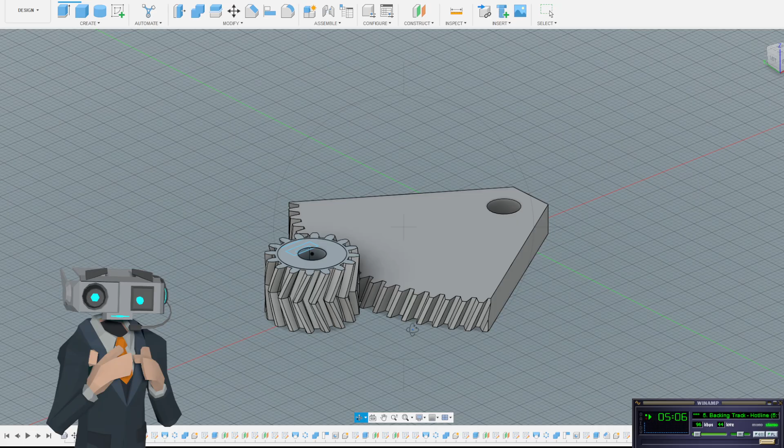We are using a herringbone gear because, let's see if we can get a good view, you can kind of see it's this V shape. The V shape is really good for 3D printing because they stay centered, they stay aligned. So these two, once this is flipped and realigned, will stay basically centered because there's 2 little V's pushing against each other as they turn around.

So if we go back to the starting screen, if you look right in the middle of Rusty's neck, you see these light gray gears, same color I used for the rest of the robot. They're making little V's, the teeth are making little V's, and they're opposite of each other because they have to be — because that's how that works.

There we go. Hydrating. Okay.

So what we're doing tonight is making a different version of those, closer to the more modern Rusty. Unfortunately the stock footage doesn't show the gears.

For one thing, the neck is shorter. Let's see how far my camera can reach here, and whether my leap motion interferes with the camera. Okay, you're looking at my monitor. Finger jump scare, giant finger jump scare.

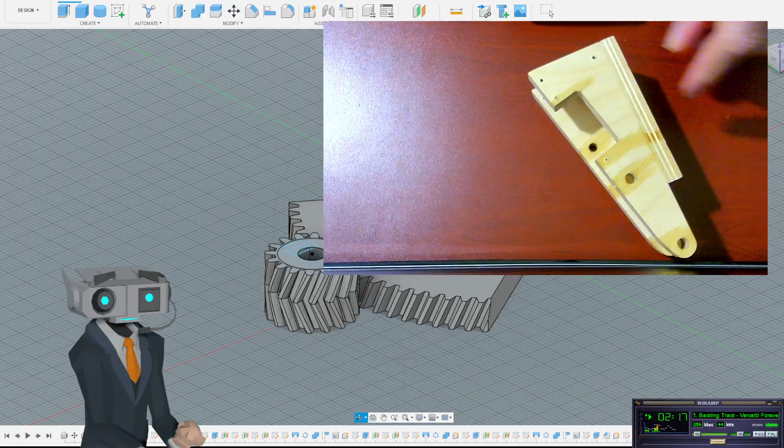So the original neck, the wooden neck, not mech necessarily. Ta-da! Those are some yellowish looking colors - it was carved out of wood.

And the little servo, here's a poor example - this is a smaller servo, and right in there, it's the same size, pretty much the same size as the servos I was using, or am using, I'm currently using. It's a big brother to this one - a lot more torque, two or three times as much torque.

So this was the original neck. You had the two small gears here. Let's see, I brought some goodies - is this gonna be my jingling the keys for chat? Here's one of the gears right here, see? And here'd be a spare, it looks like.

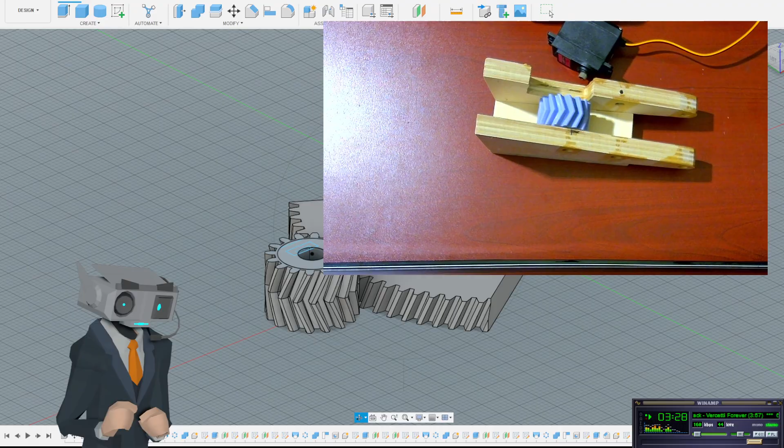Ta-da! So they would have been roughly right there. It's weird seeing it reversed, might have to flip the camera next time I think about it. So these two are here, and then the big gear, which I don't have an example of for some reason - I have a couple sitting in my workshop as spare parts. Yeah, so these lock together and they turn really nicely, see?

But we needed to change things with this configuration. Unfortunately, because it's made in wood and not all in one piece, it's still cut on - this is actually cut on my CNC, so these are precision hole placements, and this whole shape, well the top part of it, was cut out on a computer-controlled router. This way it would match.

So that everything would match up. Focus, focus, get my dried out winter hands... you're not going to focus, are you? Well anyways, these holes precisely match up, but due to the nature of assembling things, come on. Oh wow, that color correction is way off, or I need some vitamins.

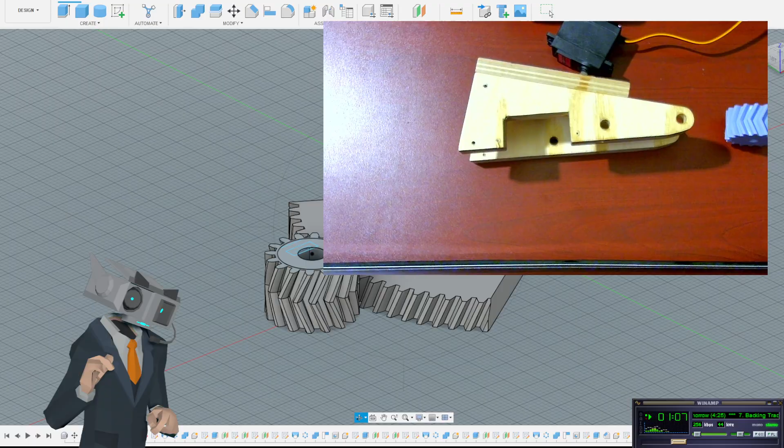There we go. So these holes, just stick a bolt in there, stick a bolt in there, and right there - that would hold the gear, so that's what the gears pivot on. And it's okay that they're on a bolt like this, at least for this one, for the main top of the neck.

It's on a bolt because the actual gear - I'll have to remember to measure that - has a bushing on it, so it's not riding right on 3D printed plastic. It's riding on a nice wear resistant plastic that I machined little bushings for on my metalworking lathe. Precision - precision helps it not wobble around.

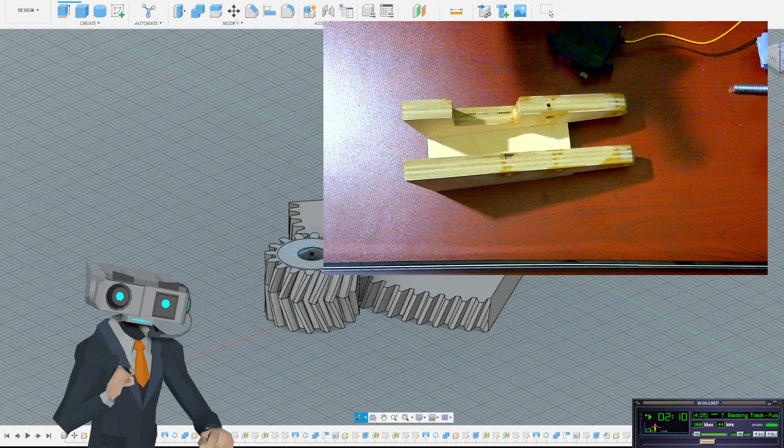And then for this, the middle one, that was sitting on a brass rod and not a bolt, so in theory it should have spun real nice, but it was just slightly misaligned, so every now and then you get a screech. And the dark spots here, I believe that's super glue - it strengthens the bond of the plywood so it wouldn't wear down as quickly, made it more like a resin, almost.

So we went from that to the first version of what Rusty is currently using, which is this - so this became this. Again it looks so weird reversed. Is that right? Yes. So significantly shorter, which helped with the head wobble. It shrunk his neck down because all that weight was sitting on this one little spot right here, so this helped with the head wobble and strengthened things up quite a bit.

So this is 3D printed, and it's the same lovely gray plastic - no more wood, at least for this part.

So the servo moved from here in the front to the back side, and snapped in real nice. I don't know if this one will snap.

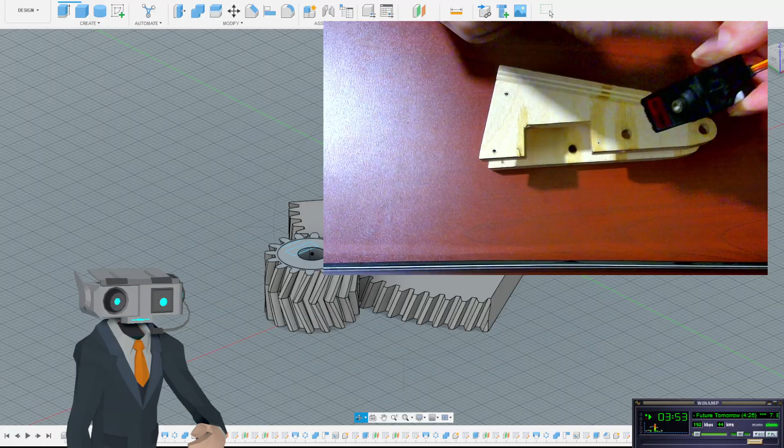Oh no, this one won't, because this one was modified. I trimmed away some of the plastic here. But the real one gives a good satisfying snap when you put it into place, attach a couple screws to really hold it there. It was very sturdy for what it was.

Unfortunately, this design... I've got to get better at handheld camera stuff, huh? This design, unfortunately, the gear here had pressure on it, pushing it away, pushing it out the back, which I fixed in the current design. So we're on revision 3, going on to revision 4 of the neck.

Here's the old wooden one for nostalgia's sake. Actually, I thought I disassembled it and was using it for measuring. So tonight's gears.

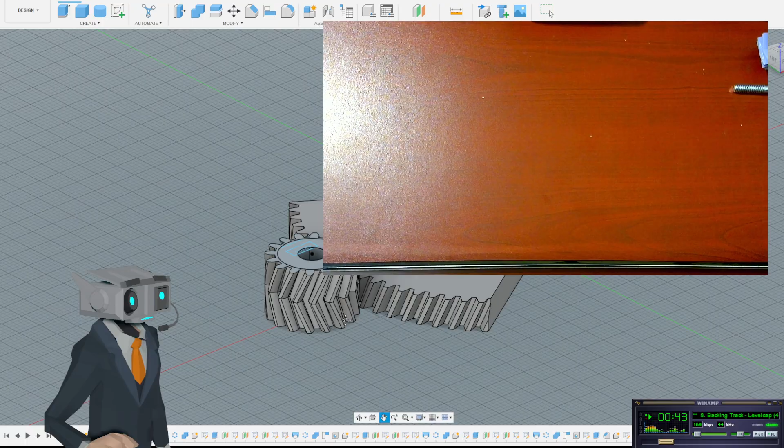What you see, what you would see if I wasn't blocking everything. Those are these. There we go, let's use that as a base.

So there, it's backwards again. Hold on, I gotta flip that camera. That's ridiculous. Oh jeez. Did I just... that was odd. Okay, we are going to flip it.

Properties. This hand? This way? Nope, still wrong. Because I don't want to look at my face being mirrored, I want to see exactly what the camera sees.

So for now, we will just go into transform and flip horizontal. So now it's roughly what I am saying, so this is this, and this is this. Okay, good.

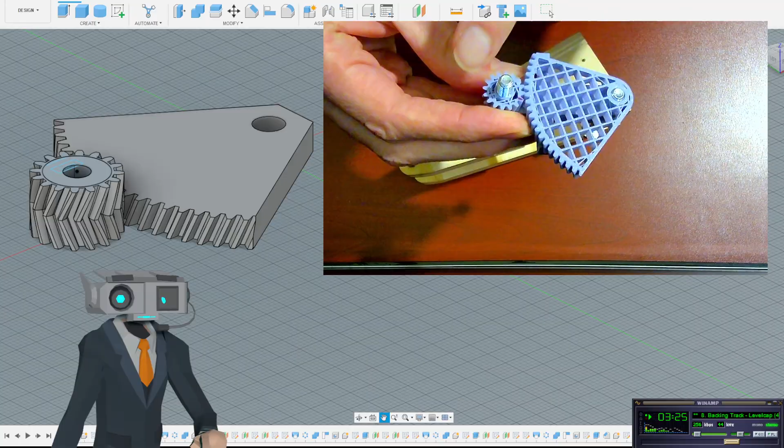This is set up for a 79 to 16, so a 5 to 1, roughly a 5 to 1 ratio. Why is 79 a weird number? Because 80 teeth was just a smidge too big, it was a little too tight.

So we can test that out, we can show you, maybe we can show you. There we go. Duh. Now maybe this would wear down enough, but it turns so much more difficult. Yeah, no, this wouldn't wear down enough. So I made it 79 teeth using the gear generator on the left side of the screen.

It works in the middle here because this is flexing. See the way that the waffles are printed? This moves just enough, the plastic is just flexible enough that it doesn't seem as bad as it is. Okay.

There we go. Now I got the idea to use this size of tooth, this size of gear, from a 3D printable, and the design of how it attaches to the stepper motor. I got the idea from a 3D printed camera pan tilt slider. There we go.

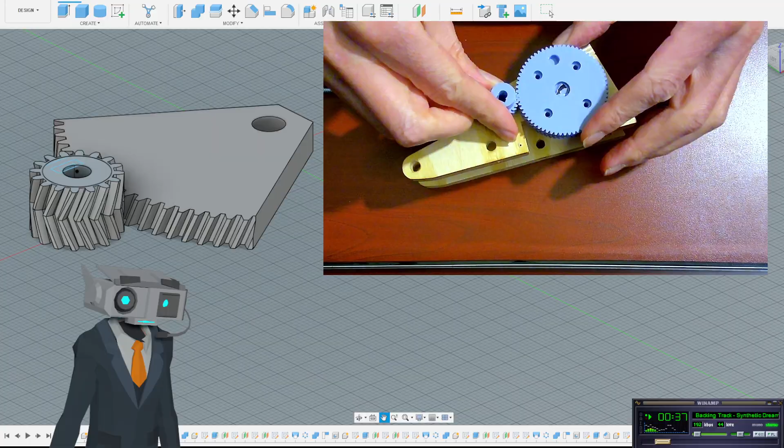See, I'd say it meshes together nice, but unfortunately my 3D printer has a little bit of what's called elephant foot, and I don't think you'd be able to see it here. But basically it squashes the first couple layers down a little bit, so it's not quite lined up. I accounted for that on the test prints though, so we'll be able to print our own gears successfully.

So if you look, there's a slight difference in the size of the teeth. So it'll give us a little bit better traction and also a lot more teeth. And a lot more teeth means we can go to a much smaller gear ratio.

See how much smaller this is? So we'll get a lot more torque, more power, more bang for your buck at the expense of the motor having to turn more.

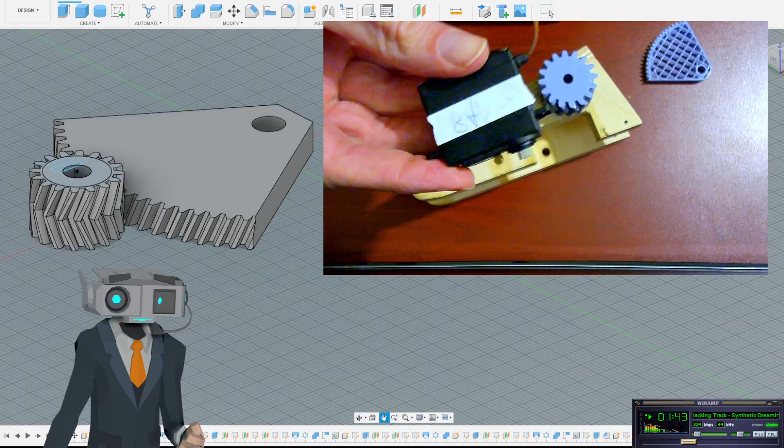So when I'm using a servo motor like I currently use on Rusty's neck - not this one, because this one's bad, see, it says so, maybe - these servos I have only turn 180 degrees because all the gears are on the inside, pretty much right in this part of the box. So the output only turns 180 degrees, this way to that way.

So the current Rusty's neck is a 2-to-1 ratio. This little gear will spin twice around to move this gear once, the much larger gear, which is over on his neck.

Way over there, see, there he is. There's Rusty. Move that over this way just a little bit. There we go. Which one is this? See, past me was thinking of future me. This is 80T, so 80 teeth.

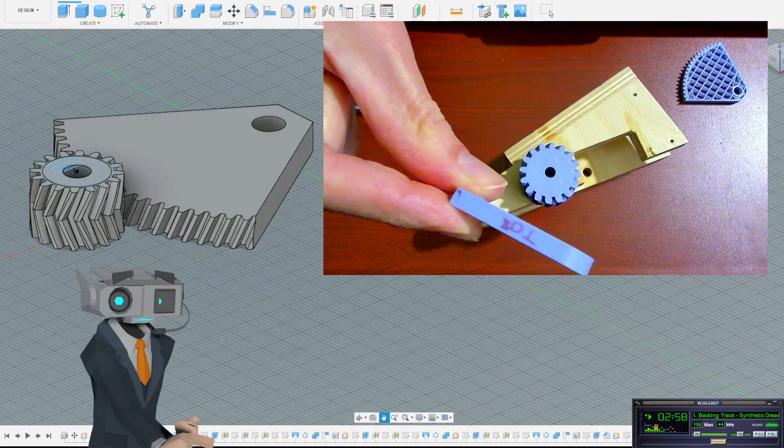And this isn't the full gear. I can bring that up on Fusion and ditch the ham cam for now, because now we know what's up. Might pop it up again. Ta-da! Here's the 79 tooth back in action.

So I could pop that in right here because this is the same distance as this little T piece. T, I don't know why it says I. I'm not entirely sure about that.

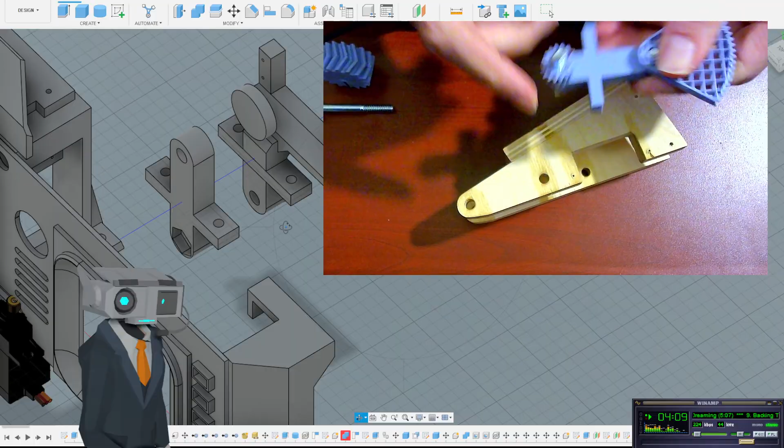This piece controls, or holds, the side to side gear, which on the screen is right here. This must have also been a test piece, so I don't think it has the hex, the indent for the bolt right here.

Yeah, but it's the same distance because I wanted to keep things similar, which we're getting away from now, unfortunately. So now the two gear sets will be different instead of matched. But the side to side is also a 2-to-1 ratio. It gives it strength, and his head doesn't need to go 180 degrees.

The original idea, one of the original designs, is that Rusty's head could be horizontal or vertical. That was one of the original designs, which I abandoned for simplicity's sake. So yes, his head could originally completely flop side to side. The side to side wasn't going to be geared at all, it was going to be right on the servo. Yeah, that's that part.

Okay, so what else I got in my goodie bag? Well, we had a failed gear with larger teeth, or what's called a different module. You can't tell super good from this one, but these are different types of gears. And how you generate the gear is important, especially in CAD software.

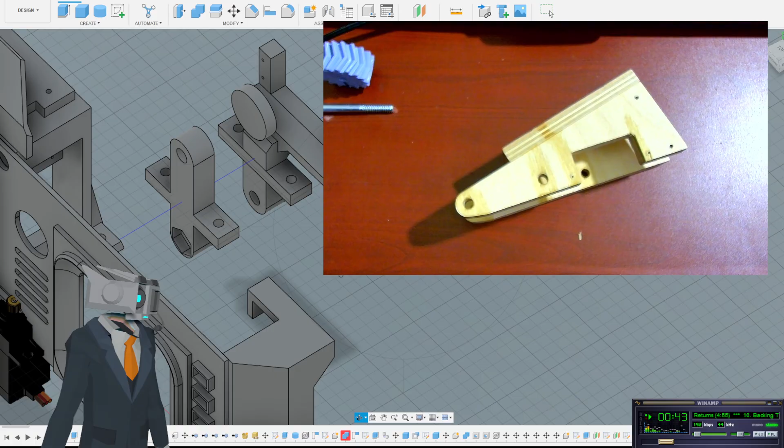I do keep most of my 3D printed parts, even the failures, because for one thing, it's plastic, you can maybe use it for something. Maybe I can scavenge something from this down the road - chop off this part and boom, I still have a servo mount. I can just bolt this down to something else, maybe.

I didn't want to burn this, it's his original neck. I'm not going to reuse it, I'm not going back to this style. For one thing, the servo, where it was mounted, rocked back and forth a bit. But it was his first neck. What did they used to do back in the day? They used to bronze baby shoes.

Oh here's the good one, there we go. This was laying down by my feet. Ta-da! There we go. We're going from this to essentially this. Yeah, that way, no. There, this. It really doesn't like to stay. There we go.

So this plastic, this gray part, is the same size as what he's currently using. It's just that it's completely redesigned, so it would take the stepper motor, again, like on a 3D printer, or a small hobby CNC machine. And yeah, that's the size difference.

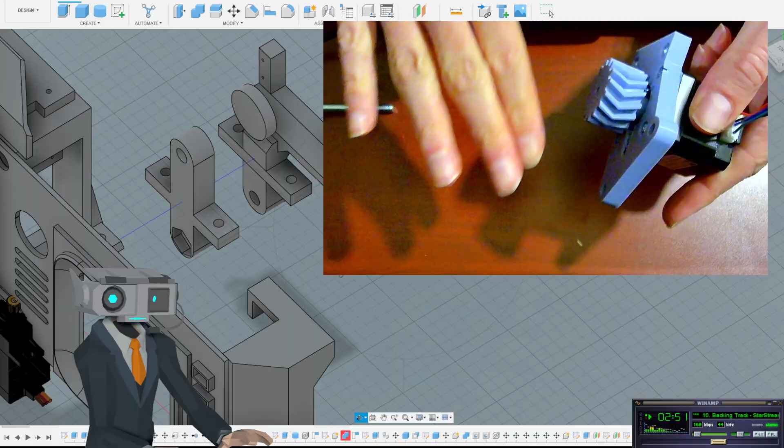So let's get gearing. The thing we are going to do is put a smaller, much smaller gear on here. We're saving the rest of this, we're not changing any of this. But tonight we're finishing up this gear. Then we're also going to make the gear it connects to, meshes with. When two gears are working properly, they are meshed.

Okay, so I'm going to turn off the camera for now and get it out of my face. Well, not my face, my hand's face.

Oh sure, the hand tracking goes way over there. I need to move my Leap around more, I think.

Just for fun while we're in here - oh yeah, see here's... I don't properly split my files apart. So here is the piece with the stepper motor. There it is, mixed in with everything else. And I have a whole bunch of stuff hidden in the assembly right now.

Let's see, neck joint. Get back over here. Ta-da! Yeah, it's not properly spaced, but it works just fine. Mostly I wanted this piece in the middle.

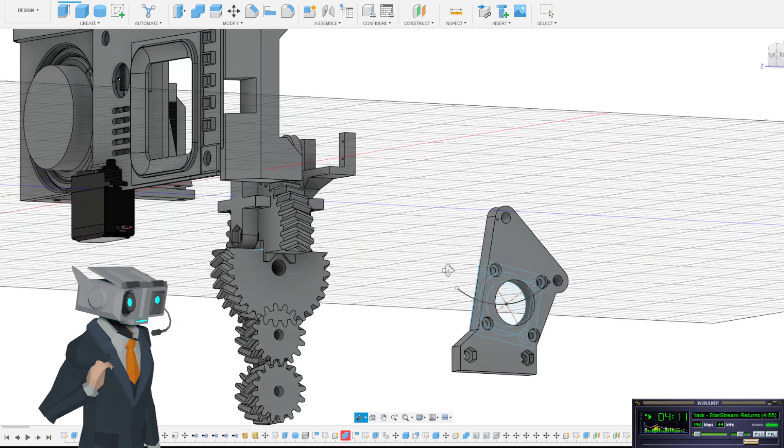So here you can see that they are identical halves at 90 degrees to each other, so you can get the nod and the side to side. And then these two smaller gears, which are 16 tooth - 16 big teeth.

Those were the original wooden neck. Currently we're only using one of these, and still the same original neck assembly. Original neck assembly - oh, look at that.

Fusion saves the background color per file. Well, that's interesting. Okay, so everybody...

I was working on this the other day, getting it all situated. I was like, okay, let's get this 3D printed so we'll have it ready for stream. And I paused and I was like, why don't we work on it on stream? You know, some more robot behind the scenes, so we're not just playing video games with the robot - we're working on the robot.

Because I probably won't be doing a whole lot of coding of the robot on stream, because by this time at night my brain is relatively fried due to doing coding all day. But then also, I have a toddler that likes to wake up at 4 in the morning, so by 9 or 10 p.m. it's a wee bit late.

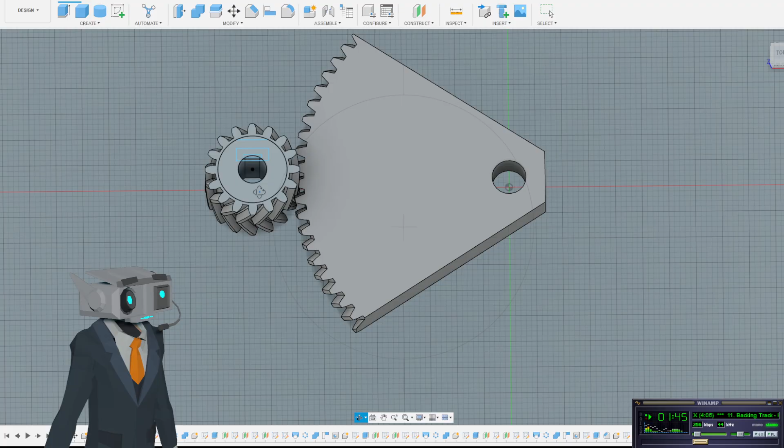So, but yes, I thought, why don't we just do this on stream? I already have it sketched out. So in Fusion, one of the ways to generate shapes is to sketch it. Let's pick a perspective, non-perspective.

Okay, so basically I'm using a gear generator because I'm not drawing this - theoretically you could do it. I could do it in like Illustrator, probably. Map out the shape of the tooth and then rotate it by a correct number of degrees, and then take that line art, bring it into Fusion, and extrude it. Got the extrude tool up here.

Ooh, oh you don't get the nice pop-ups because yeah, I'm doing application capture instead of monitor display capture. Display capture, window capture, there we go. I think I'm doing window capture, so you don't get the nice pop-ups, but we'll just have to deal with that for tonight.

So what we have here - get a little more centered - we have the gear. It's already helical, which means it's a helical gear. It means the teeth are at a slant.

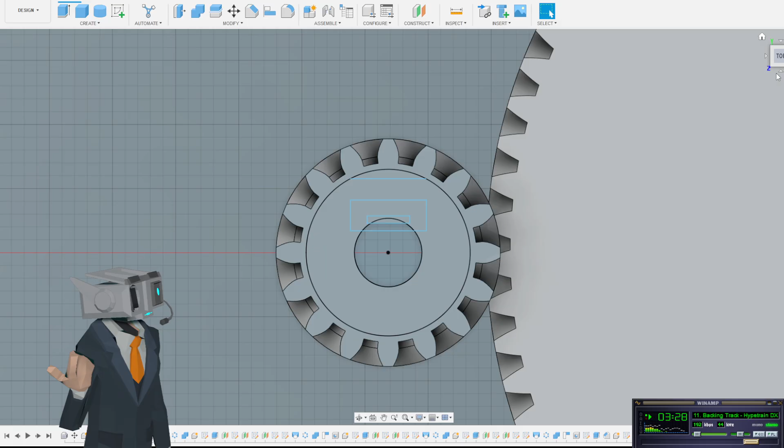But then I copy it, mirror it across an axis so it looks like a V instead of just a slant. What I mean with that, let's go perspective again. Perspective - so this is the helical gear that it generates. Yes, but then to make it a herringbone is basically just two helical gears pasted together, as far as CAD is concerned.

Yes, so this one's already set up, much like the bigger gears that Rusty is already using - these guys, see? We're just making them with more teeth, smaller teeth, and a different gear ratio. So I already have it drawn out on how I want to extrude this.

So what we have right now is we have it set up for a stepper motor shaft. I did the measurements - so with the stepper motor shaft, there's a little flat piece, so it's round, and then there's a little flat, which you can then attach pulleys and whatnot to. So that hole's already done.

I've tried it and the printer does a good enough job - my 3D printer does a good enough job. I can slide the gear on there and it stays put, but I want that little extra bit of insurance so the plastic might not just rip out.

So we're going to also add - zoom in, there we go - a spot for a little nut and bolt to press against the shaft like a real pulley would have. It's called like a set screw or grub screw - I do get those confused, even though I've worked with them for decades.

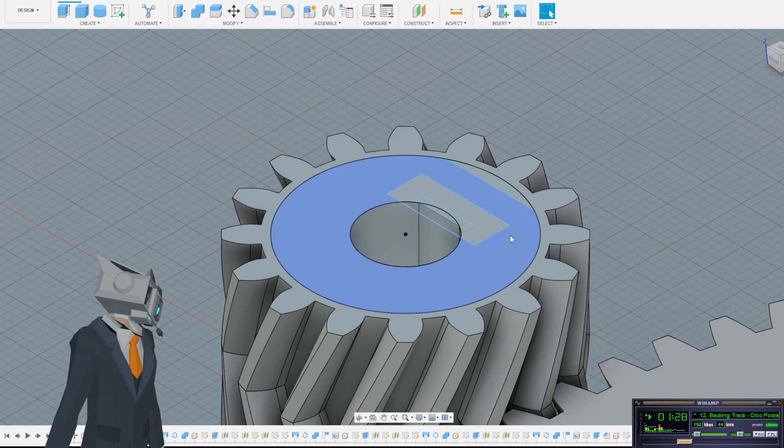So, how far do we need to go? Let me get my trusty calipers here. I'm taking dimensions off of that camera slider with a different size gear. Sadly, I couldn't just use those gears right off of the rack.

Okay, we're going with 8, and we're doing a little bit different shape. So this is a sketch that I've drawn. We'll be using a sketch again soon enough, I'll show you then. But basically, I've drawn out these shapes. Now, okay, fine, twisted my arm, twisted my own arm. Edit sketch.

So instead of doing everything one operation at a time, you can lay everything out first before you do it and use that as a reference point, or, what I like to do, is setups for extrusions. What we're going to do here is...

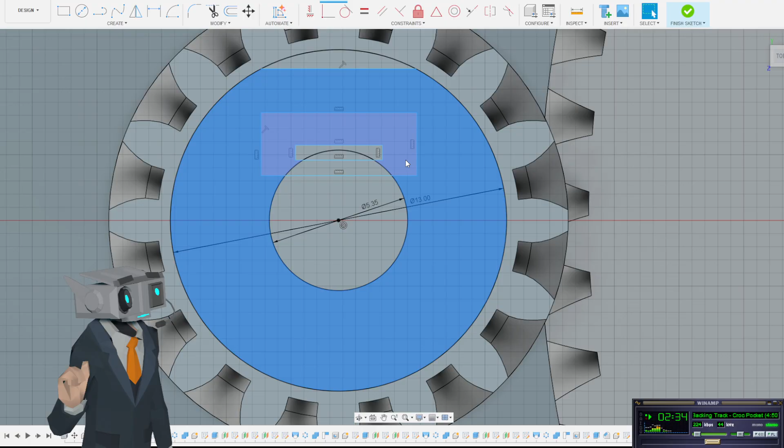So I left a flat spot on top for the bolt, and this is where the hex nut goes. So it's a hex bolt and hex nut. This is where the hex nut's going to be, so that the bolt stays put and it can press against the motor, hold it in place. A lot of talking for a fairly simple thing.

Okay, we want this, and for now, this. I'm gonna finish the sketch. Extrude 8. So that's 8 millimeters. Doesn't seem like much, but this is tiny, this is pretty tiny. Okay, and we're joining.

So we're... yes. Oh, you're not getting any of this. I will have it set up differently the next time I do a CAD stream here. Does it get doxxed? I mean, I did change my team hub to Rusty Industries, so I think we're good. I will, if anybody has any questions, I will step you through it.

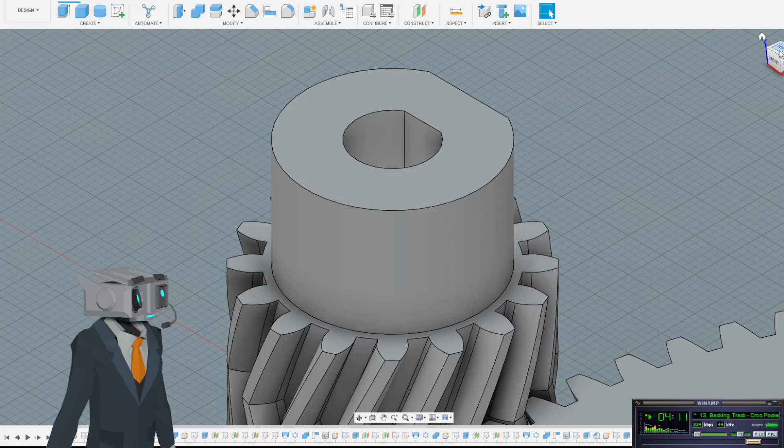Okay, so we made the hub. And now we need to cut a slot into the hub.

Where am I? Where are you? There we go. Okay, make it invisible for now so we can select the stuff. Take this, and I believe... yep, we're just cutting this... oh, we're cutting this rectangle back into it.

So now I want to see this again. This time we're using slightly different settings. We're going to extrude, we'll make that 8, but we are changing how it extrudes. We're going to change it so that it extrudes from this plane, the top of the gear, but with an offset. Let's find out what that offset is.

Now, I should really take it off of the gear I'm currently using. Hold on. There we go, much better.

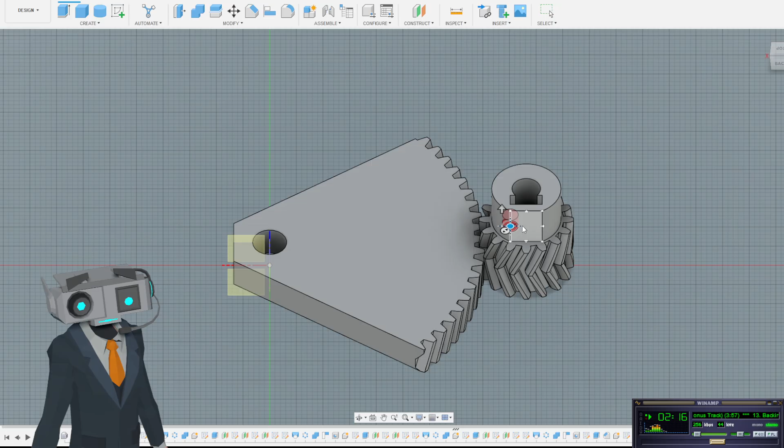I'm going to narrate a little bit, that's the hole tool. Narrate a little bit because unfortunately window capture does not do its job. Let's see, window capture doesn't show the windows, doesn't show any little pop-ups. And this is a problem with Maya too, and I imagine any app that does such.

3.5. Make sure it's deep enough. I do love how it gives you a little preview. Yes, so this will cut plenty deep. There, and now we have a hole, simple as that.

We don't have to worry about polygons or anything because this is solid modeling. It is what you see, what you see is what you get. It is solid. If you want it to be hollow, you can worry about that in whatever you're using to machine or create the physical piece. In my case, it'd be a 3D printer slicer software.

Or you can use some of these fancy tools, which you won't be able to see because they're in the menus, to effectively hollow out. So you can control in the CAD software how you want to hollow out the piece. If you want it to have 3 millimeter thick walls, basically, you can do that.

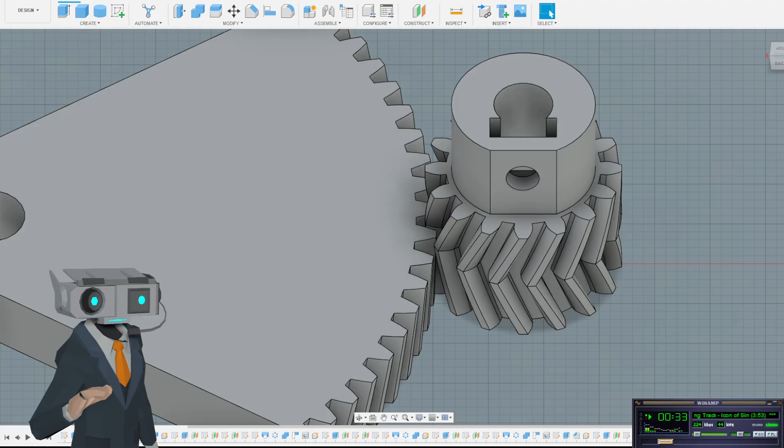That is a thing you can easily do. And a cool thing about this, and probably other CAD software too, if you see this timeline down here, all these little icons are all operations. This is effectively, I could Control Z through them. These are all the steps that were created to make what you see, even if I'm selecting different pieces, it's all on one history timeline here.

Cool thing is, well, we're not far enough. I got Winamp blocking everybody. But so I have this piece highlighted. Let's do this hole over here. We have this hole I punched in here so I would know the distance. That hole is blocked by Winamp. Here we go. How's this one?

This was part of the gear generation right here, where it made this top surface. I made a few trial pieces, so there are lots of gear generations in here. But yeah, this piece is done. We can now send this to the 3D printer.

Almost done, almost done. I do have to do one little thing. Let's see, we are going to... Will it let me chamfer? 1. No, it will not let me do 1. Will let me do 0.5.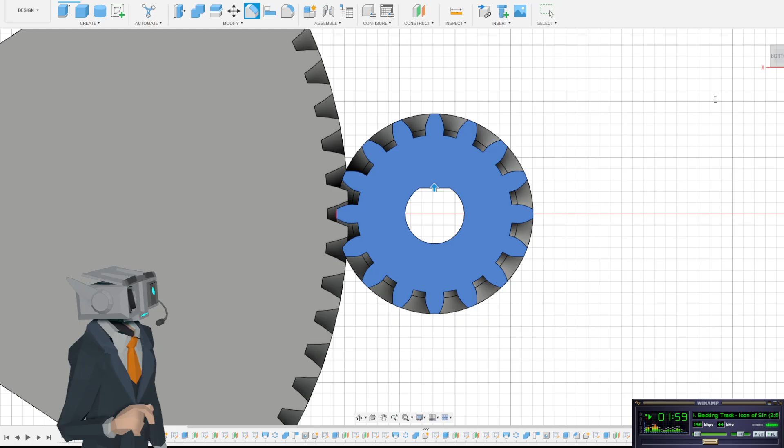Yes, okay. So earlier I said that my 3D printer has a problem with something called elephant's foot, where it kind of squishes the bottom layers of it. It's very annoying. A way around that is to add this little chamfer. You might call a bevel, but it's a chamfer. Essentially thinning out the bottom of the piece, in this case, to counteract the elephant's foot.

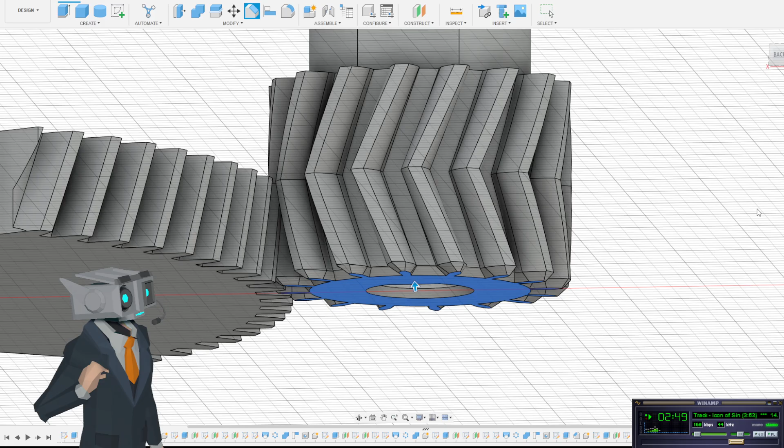I think 0.5 is enough. There, and that should be good. It's especially, most pieces it doesn't bother me. Like structural pieces, it doesn't really bother me having that. I can usually sand or slice off a little bit.

These are teeth. There are 16 of them here, and there's going to be about 40 of them on the big gear. I don't want to sit there with a tiny file, which I do have over on my workbench, zipping each and every space in between the teeth. No, thank you. So we do this the right way in the first place. Or the easy way, at least. The easy way in the first place.

Okay, so that gear is done. We're gonna do the same thing to this one.

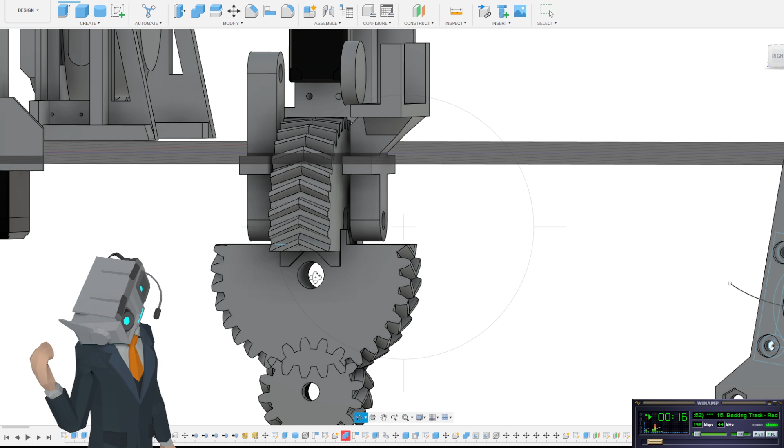However, I'm wondering if we want to redesign it a little bit. So here's his current neck, and it is a little more than 180 degrees of the gear, because this hole is the pivot. This is the center of the gear. It goes a little bit past that, just to make it easier to mount everything solid.

Technically, I could have chopped off some of these edges, and it'd be just fine. He doesn't tilt forward or backwards 180 degrees. And I really don't want him to.

So I think for now I'm going to duplicate this. Let's see how wide these pieces are. Does it say? It does say. There you go, some of the things pop up. 20 millimeters. We are currently working with 8 millimeters.

And these are glued together also, so these are the exact same gear, same orientation and everything. And then one is rotated and they're glued together with super glue, and they do not come apart. I left little tabs here to kind of guide them and lock them in place, but also if I needed to put screws in, no. Super glue. So it's a 20 millimeter by 20 millimeter connection, and it has held for over a year now.

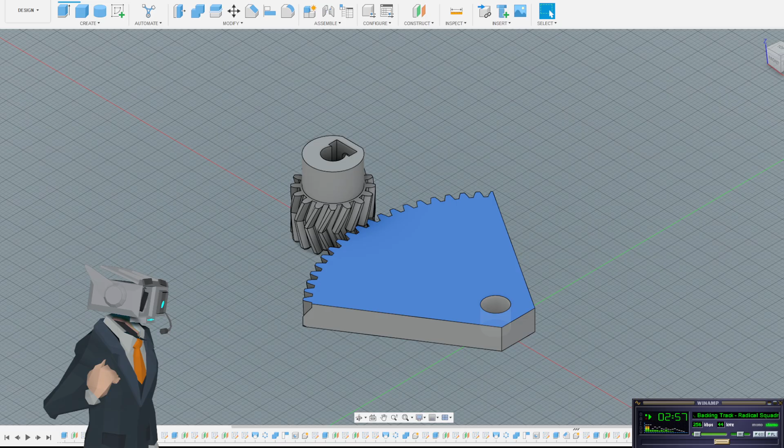So I just need to find where we sliced it. Is it this operation? That's a combine. Extrude. Mirrored. Pardon me, I'm talking to myself here. So that's the hole.

Here we go, sketch 7. What steps use sketch 7? Right here. Okay, so I extruded a shape that cut away. Normally when you think extrude, you think you're making things thicker, pulling more out of a shape. Well, in this case, you can also pull something up but cut away.

So what we're going to do is edit this sketch. We're going to go back in time and change this. We have this Pac-Man shape, and we're going to take Pac-Man and make him less Pac-Man. Okay, the pivot, the circle, is right here.

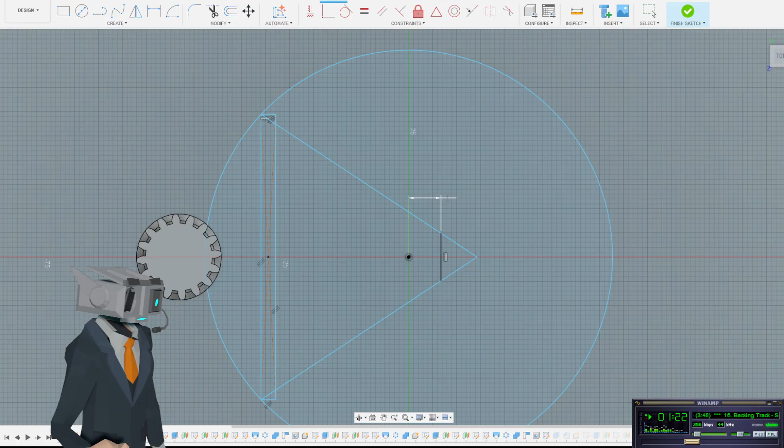One of the wonderful things about CAD is you can kind of do what you want. So that line, yeah, basically we want to cut this whole thing down, right to there. It was that easy. That is as easy as it is.

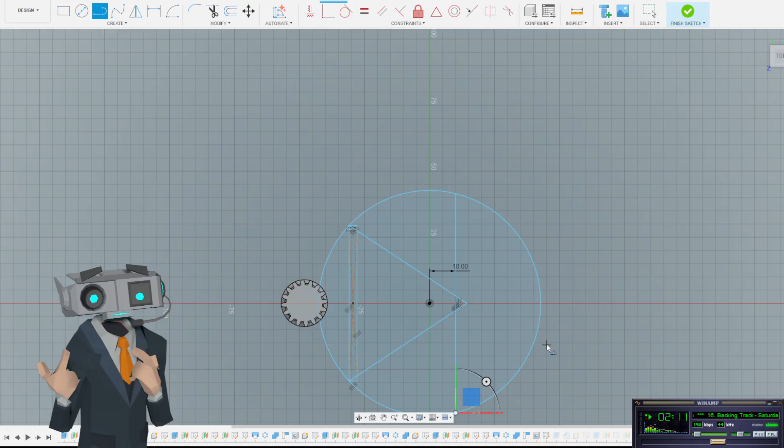Like I said, we are going to need to make spacers to hold the wider gear to the thinner gear. But I'm not certain if I want it offset now, because we have a lot of space right now in his current neck, and that space doesn't need to be there anymore because the gear is going to be so much narrower. So I'll be making a little adapter piece later.

Because I'm gonna have to reprint the side-to-side gear, and I'm gonna have to reprint this top gear anyways, because it is glued very, very well to this gear. So when I reprint it, I will move these little tabs, these little ears, gussets - well, these might technically be gussets - we're gonna move those in just a little bit. We'll figure that out later though.

That'll be a problem for later Rusty. Current Rusty is good to go. All right, so we have the hole here, and we have all of this here.

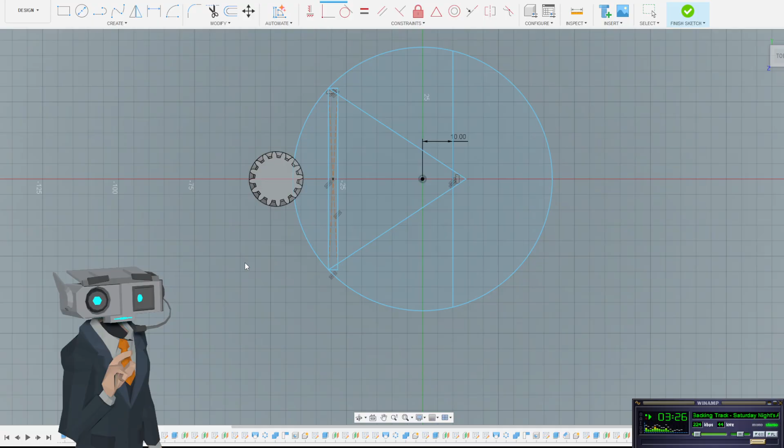So we finished this, we edited the sketch, and now that will update - that will update the shapes that are already out there. Completing extrude. It had to think about all that fancy gear stuff.

And now we go to the extrude. Is that this one? This one, where we cut away. Oh, topsy-turvy view, come on. There we go. So not that one, not that one. This one. There we go.

So we're going to go back in the past again and edit things. There we go, ta-da! You can see here's where I extruded the Pac-Man shape. Now a fun thing we can do is just that - we're done. Well, we're almost done.

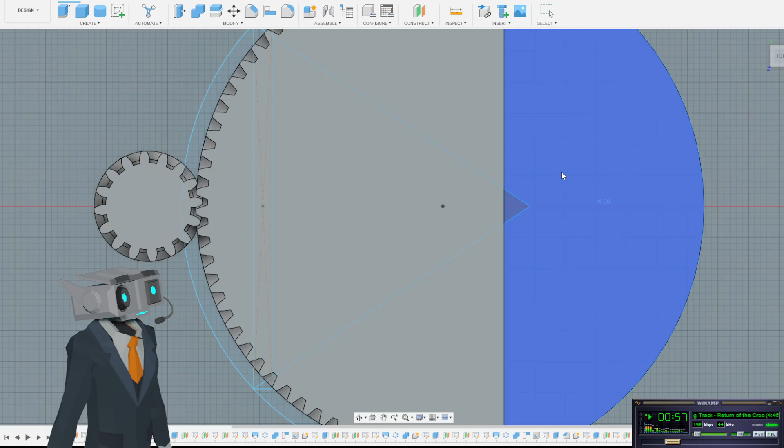Two little hanging-on pieces, but there. It has to think a little bit - normally it doesn't take this long to think, but also normally there's not a whole bunch of these complicated looking angles all over the place.

So there, now we have the right shape. It already has the same hole in it, the correct hole. So it looks... oh, that hole was dependent on where the cutoff line used to be. See, I figured there'd be a problem for current Rusty.

Still though, I absolutely love that you can just go back in and edit features. I'm just gonna plot that right there. 6.41 millimeters - is that about the right size? That is not the right size.

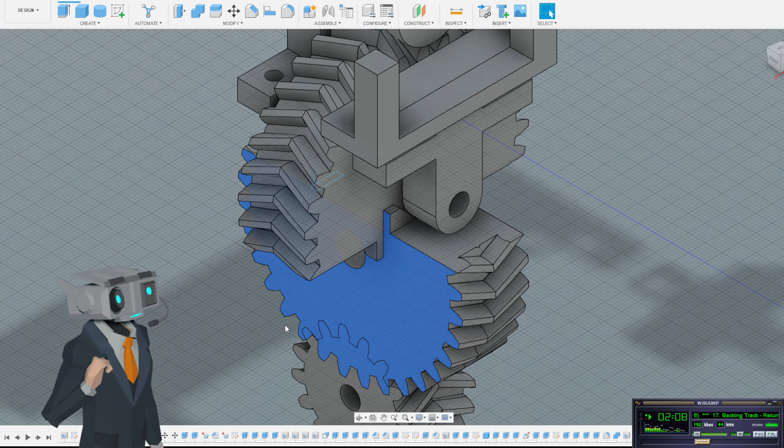Uh-oh, uh-oh, uh-oh. For a second there, I thought we crashed.

So this hole is significantly larger because it has a bushing, a little machined plastic piece. Let's find out how big that is.

Okay, diameter is 9. You can't see, but there's a nice little tool window, an info window over here that tells me what I clicked on using the measuring tool, the inspect tool. It gives me the radius, the diameter, the area, and the loop length, which I assume is the circumference. Okay, so 9 - that makes sense now.

So where were we? Yes, editing features, because why do it twice? Why not just go back and redo it once? That's exactly 9? Okay.

There we go, fixed. And it's directly on the origin point, so that's how I know it's where it's supposed to be. Now we do the easy part. We take this, we save.

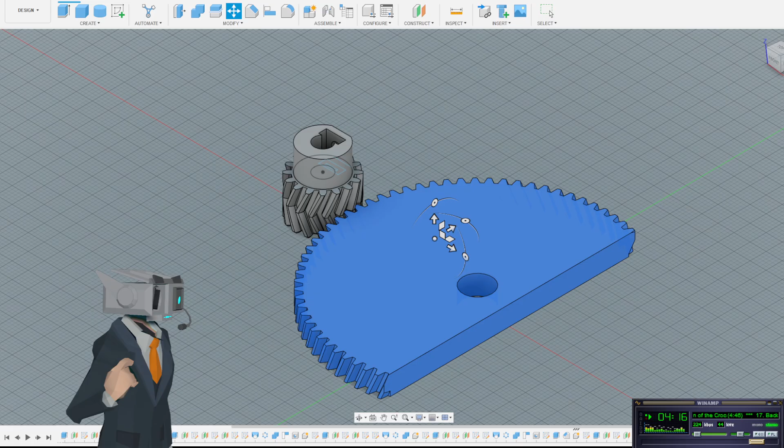We're going to move object body. Or do we mirror it? Do we mirror it? Oh, we mirror it. Sorry. My mistake, my mistake.

You would think I was just in here the other day. Mirror, there it is. For some reason, mirror is under create instead of modify. Mirror plane, join.

And now we have a helical gear. Ta-da! And it looks like they're pointing opposite of each other. So big success, big success.

Now we can print it. This one does not need the little hub, it does not need this part on it, because again, this piece gets a little bushing put in it.

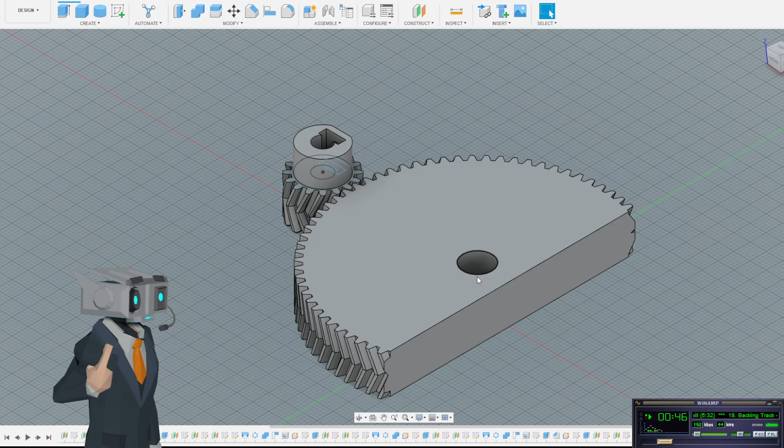I could just bring Rusty's head over here. Yeah, there we go, gears. We've got gears, folks, gears of robot. Beautiful, beautiful. Let's turn off our sketch.

Make a screenshot. Boom.

And then to send this to the printer, yeah, we could do that. Let's see, the little gear shouldn't take too long. I mean, we're not going to do it tonight. I thought about it, we're not going to do it tonight, but I thought about it.

I'm going to save. Here's herringbone.

Okay, so we select our piece, our body. Go to manage. Nope, we don't go to manage, we go to utilities. And this is available in the personal version too. Over here, again, you're not seeing my darn windows.

There's a little export, and I think I just left on the default settings. It says output selected object, which is the blue because it's selected. I'm outputting it to an STL, which is a, what does it stand for? Standard something lithography? It's for 3D printing. And we hit OK, and I'm saving everything on my desktop because that's where it goes. Oh, you're not getting this window either.

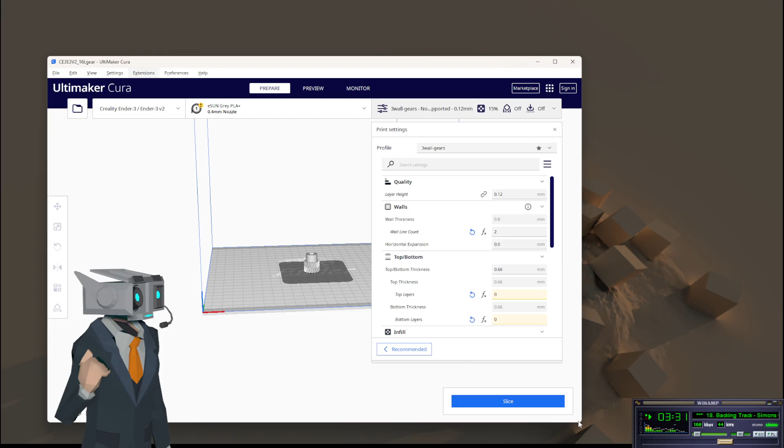So I use Cura, it's nice and easy. But here, look it, here's our little gear. And this is set up for my, I have an Ender 3 V2. There we go, and settings that I found have worked out great for gears, specifically these gears.

So if you look at the bottom, see this teal, this lovely, hey, it matches my eyes. Look at that, so this lovely teal. If you look on here, this is what will be touching the printer bed.

So this will be the first layer that's printed once I slice it. So you can see it's a little bit smaller. Hopefully this counteracts my, it did at least in the test print I've done of a very similar gear. It counteracted the printer errors.

I just really need to calibrate it and adjust the tension, look up more tutorials. Most of the time it's not a problem. What could be a problem is this little hole right here.

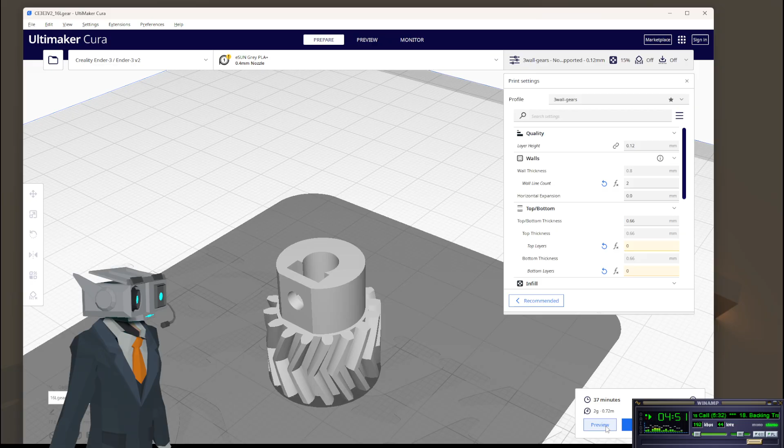37 minutes, this will take 37 minutes and use 2 grams of filament. Oh, it'll use more than that.

This is again for the test piece, which does not have a top or bottom. Let's change those back. Okay, we're gonna have 3 walls, we're going to have 4 tops, 4 bottoms. Oop, not 44. There we go.

There we go. Now it's going to take a couple more minutes, 5 more minutes, and use 3 grams. Not much more, not much more for this tiny gear. It makes a big difference for the 79 tooth gear.

But see, there you go, there's layer 1. And it quickly adds in more layers, or more thickness. Grows up big and strong. Does a little boogie woogie as the teeth change direction. And there we go.

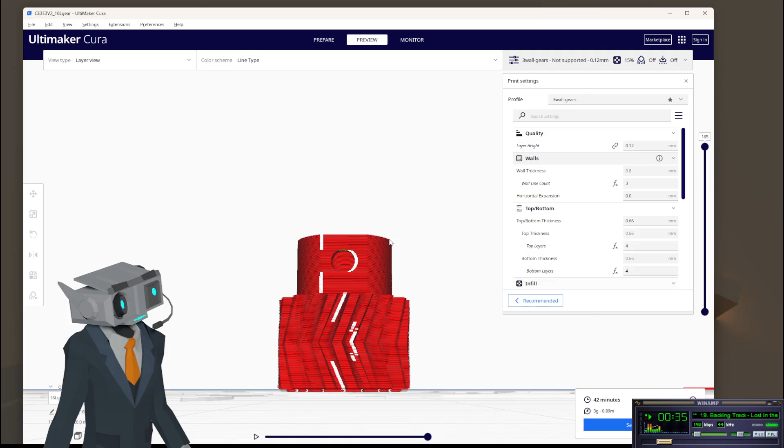And my printer's good enough with doing overhangs that I can do circles like this with. It's just slightly oblong, but it does just fine with circles. There, beautiful, beautiful.

And we're just gonna save that, and call it good. Oops. Oh, my windows are janked up.

And you know, we can do the same thing with the other one. Fusion. Hey, look, you get actual fusion.

Select the big gear. 3D print. Oh, here's what the windows look like. See? So I selected the gear, set it up for export using this lovely make button. I just hit OK, I'm okay with the default settings. We'll call this 79T here.

Saving to desktop because I'm a heathen. Let's minimize that and load it up in Cura.

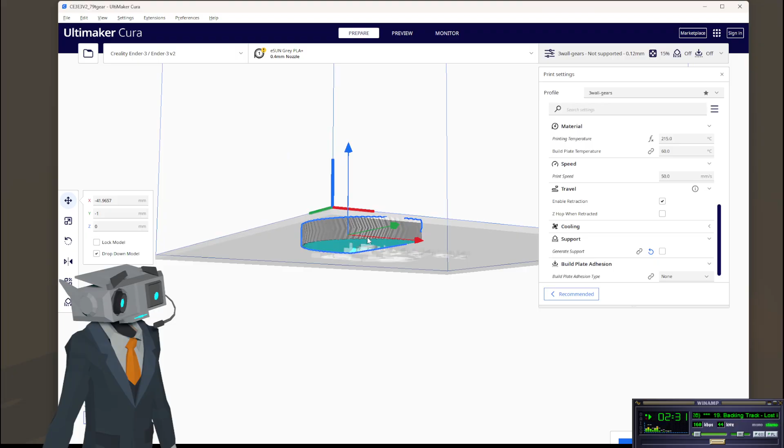We have to go back in and shrink the teeth thing. Yeah, this one's going to take 2 hours and 49 minutes, so almost 3 hours. And it's going to use 5 times the filament.

Nope, I need to change more settings. I just thought of this. So it's a good thing I'm doing this and talking it through.

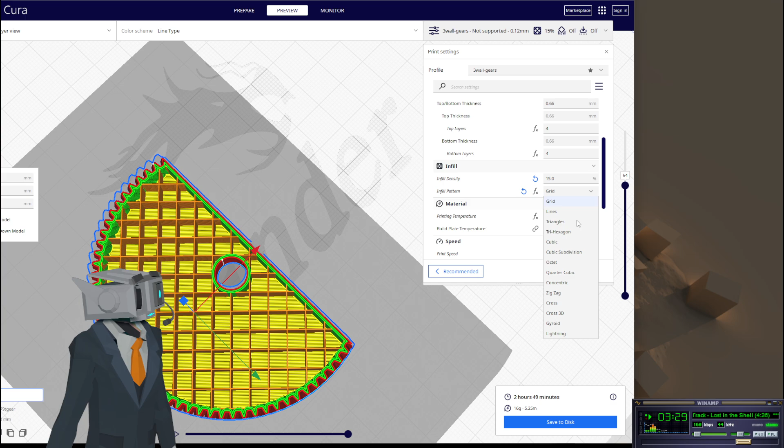So, if we look, this is using a grid infill. What I like to do for gears, especially if they're going to be doing a lot of work, is we go down to gyroid. What is gyroid? Spaghetti. It's funky spaghetti.

So what it does is it draws zigzags, and it looks pretty funky. But what it's doing is it's rotating those curvy lines as it goes up layer by layer. And it makes it really, really strong. Like incredibly strong.

It doesn't take that much longer either, it takes almost the same amount of time. But it's funny watching it print because it just goes like this, back and forth, back and forth, both the printer head and the bed, just wiggle, wiggle, wiggle. But this is significantly stronger. I only really use it for gears.

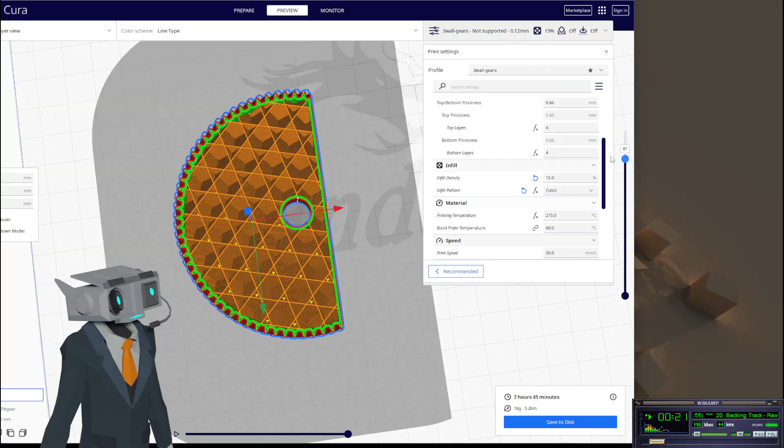Otherwise, I like using cubic, and just for fun. This is cubic, kind of like triangles that change shape and look kind of trippy. So it's a grid of triangles. And that's what I use for anything that's more structural, because it can take the force from pretty much any direction. So like the support brackets, so the sides of Rusty's neck have the cubic infill.

Okay, but this is a moot point for this because we need to put that bevel on the bottom first. Clear build plate. Go back to Fusion, capture.

Okay, so one thing about Fusion that I don't really care for is you can't just right click to swing the view around like in what we were just doing. You have to click the orbit button on the bottom and do it.

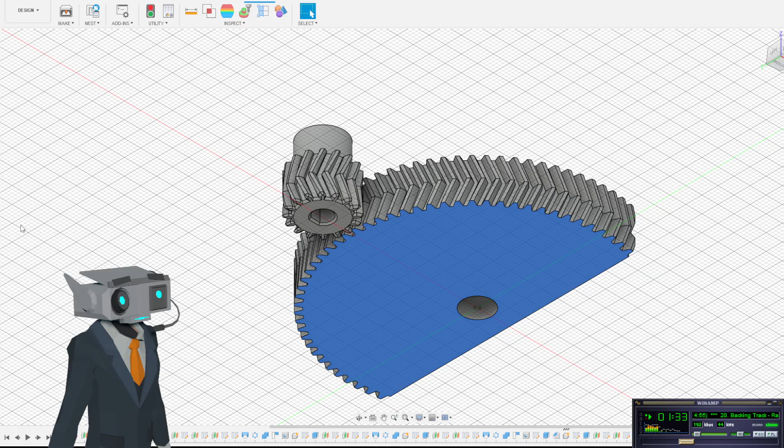So we're going to take this, go to the body, put that little chamfer on the bottom. And I'm thinking a 0.5 is enough. It looked like it would be enough. There we go, little chamfer on the bottom. And just for fun, we're going to put one on top too.

I'm waiting for it to calculate, because this calculation will take longer because it has to make these lovely little chamfers on each tooth. Look at that, all these little angles it has to calculate. I'm going to do the same thing to the top. But yes, 0.5 millimeter looked like a good amount. We're doing the top purely for aesthetics.

Sorry, spammer bot, you've been caught. And it looks like SiriBot was the winner of the Catch the Spammer race.

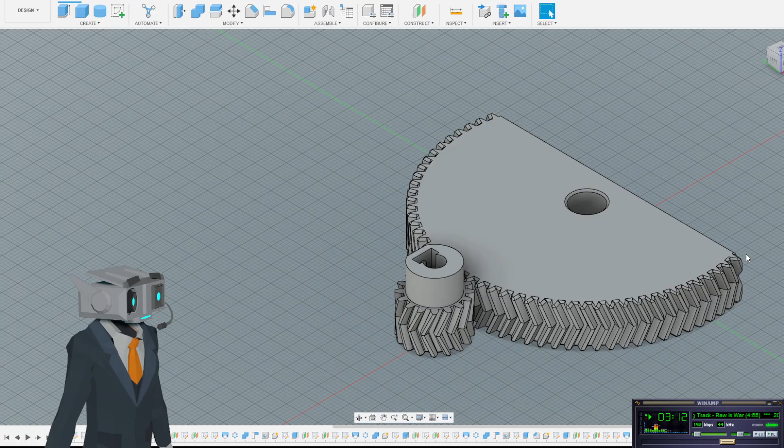Okay, yes, so now we can select this and bring it into the 3D software. We're going to overwrite the 79T gear. Yes.

I don't keep anything doxy on my desktop, mostly for streaming purposes, but I don't know, I'll show you some of the pictures in there. It's kind of fun.

Okay, but first, I'm gonna switch the infill to the gyroid, and what was the other thing? Top layers. Okay, we got the layers set. We've got the layer height, 0.12.

What I remember reading when I first got my 3D printer, reading up on everything, watching videos, is you want to go with the type of printer I have, you want to go at a multiple of 0.04 for your layer heights. So 0.12, 0.16, and 0.2. If you really want to go fast, 0.24, which I haven't used. So this is a good combination of settings for what I'm doing.

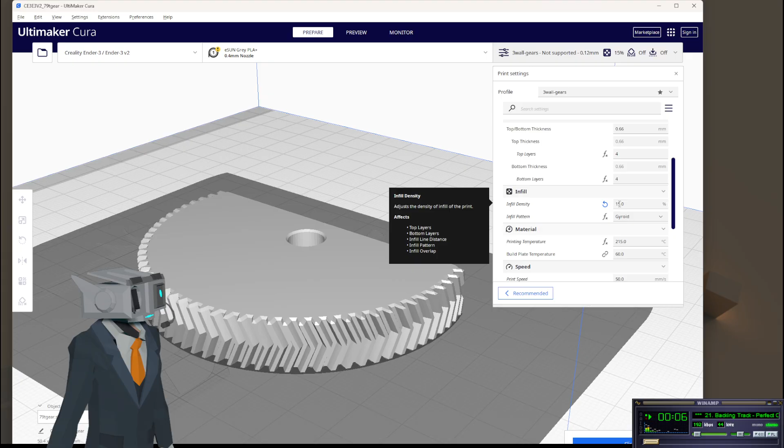I don't think I need to go any higher in reinforcement. This isn't a gear that's constantly turning. Then I would do something a little different if it was constantly under load in a transmission or some kind of gearbox. But that's not what we're doing with this guy. We're making a funny little robot nod his head.

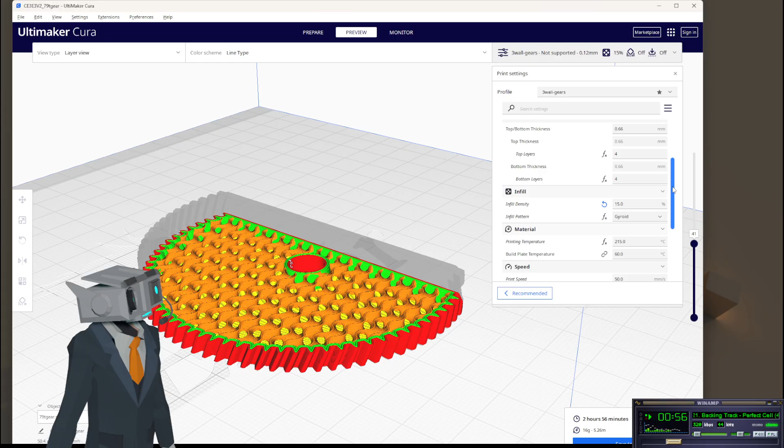Yeah, that should be plenty of reinforcement for what this is. Most of the strength is honestly coming from the 3 walls. If you look, 1 red, because that's the outside wall, and then 2 greens. I found out that's plenty of reinforcement. We're just going to save that and call it good.

And immediately load up that other one and fix it, because otherwise I'm going to print the wrong gear. 16T gear.

Let's see, where are we? Move you that way just a little bit. Gyroid settings, blah, blah, blah. 41 minutes. Okay, done.

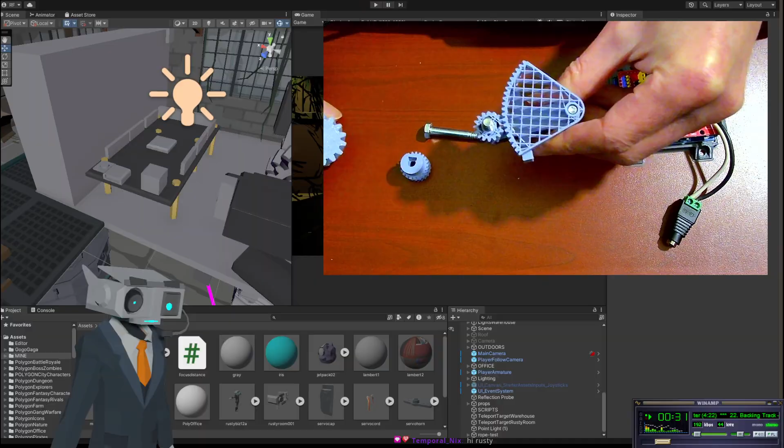But we just finished up finishing these test pieces. This was the test piece for Rusty's new gears. I think I posted in the Discord, I might not have. So this is a test piece. It's a little hollow, won't hold a whole lot. This is going on the motor. It's a little bit smaller than his current gear, a little bit. We'll get a little bit more power. It's going to look more like this when it's finished, a little bit more like this.

And we just finished getting everything off to the 3D printer. Because you missed the exciting CAD. There we go, there we go. Exciting CAD.

Ta-da! So if you look, reverse angles are funny, but yes, this is basically this. Except finished on the screen. Yep.

So this is going to go on the stepper motor, and this is going to attach to his neck. Except I have to reprint the current gear that's there too. So it'll be a little extra 3D printing.

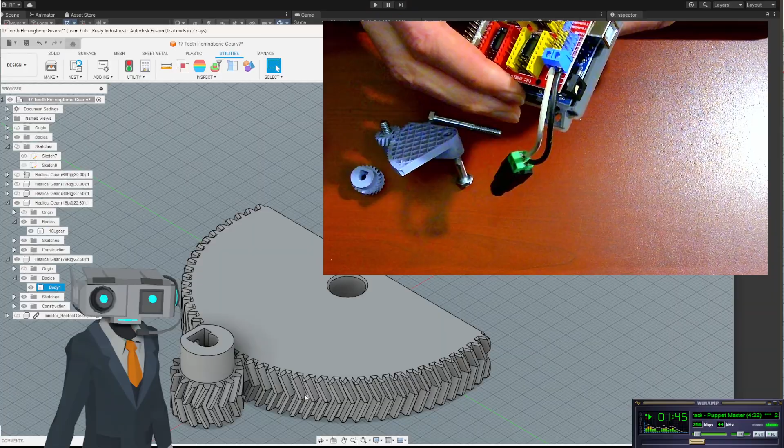This is the little CNC board. When I say CNC, I mean computer numerical control. So this is what's called a CNC shield. Arduino calls them shields. The Pi stuff, Raspberry Pi, they call them hats. They sit on top of the main board.

There we go. So here's an Uno. This one's a generic board off of AliExpress, and so is this, because I didn't want to spend a lot of money on something that might not even work for my purposes.

But here we go, I only have one motor that's going to be hooked up to it at the moment. One stepper motor, I should say. The servo motors don't use this. They use something more like this, the slightly bigger version of this that's currently bolted down inside of Rusty's head, that we modeled up last Monday.

That's right, that's why I brought up the other screen. So this purple piece right here, it's called a driver board. A stepper driver.

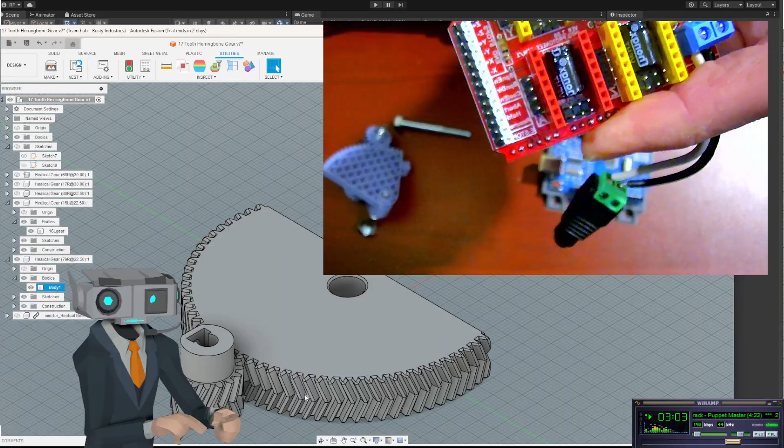So you need this piece, the main control board. This is a circuit board with extra pieces. Extra pieces do all these little extra things I'm not going to use, like limit switches for how far your machine can go back and forth. This is basically the same thing as in a 3D printer too. But I can control one little motor here, up to 4.

Here's the power. This goes to a 12 volt power supply. Got a nice little power jack on it. And this will plug into Rusty's main board. For now it's just sitting on here to protect itself, because we're not using it at the moment. Well, oh, that wasn't much of a snap. Sorry you don't get snap ASMR.

There we go. But this is why we're in Makers and Crafting right now. We're hiding out in a different department. Oh, it's funny how much larger the motor is than anything else.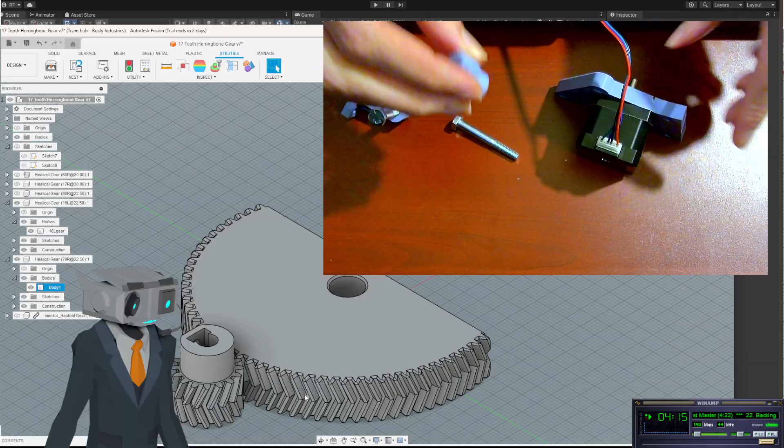Because we will be using the stepper motor, and putting, well I'll just use this as a stand-in. Essentially this will go right onto here. Find the flats. There, pretty much like that. See, so that's a little bit smaller than that guy. And this one wobbles. Mine fits, I designed it so it fits just nice and snug on there. So another motor comparison. A little bit different sizes. And they do very different things.

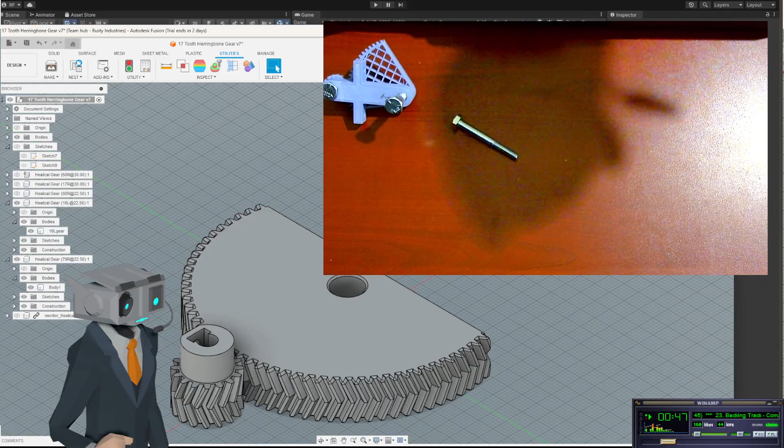Okay, so remember that control board? That guy right there? Oh, so for scale, before I start, using Freedom units, this is a quarter by 2 inch bolt. In freedom units. In what is it in non-freedom units? Where's my rulers hiding? It's roughly 50 millimeters long. So that's about how wide this board is. So 5 centimeters, not very large, not very large.

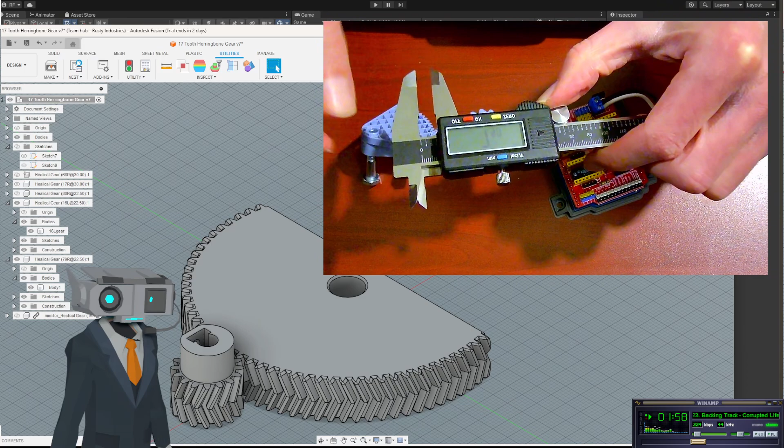We're going from a gear of about 36, about 35, 36 millimeters down to one that is significantly smaller. About 18 millimeters-ish. All these fun measurements, so digital calipers. Won't show up too good because it's an LCD, but basically it measures anything between here. You can even measure all sorts of different surfaces. You can measure from this flat to here. Really, really, really handy. It's like 20 bucks on Amazon. Totally worth it for hobby machining, like I do.

One of the other things I do is have some metalworking equipment. I do hope to show on stream again. I'd say go look at the workshop stream, but the VOD is no longer up, so I need to get that working on. Add more and more videos to the VOD page on YouTube. I think I only have a couple of them on there right now.

Oh, but I did find, I have a very old metal lathe. I did find this cool picture of some fine gentlemen in the IBM machining lab using almost the same exact version of the lathe that I have for working metal. So it's an old precision metalworking lathe. Basically, a lathe makes round things smaller by cutting away metal, super simplifying it, but I thought this picture was hilarious. Not hilarious, but very interesting. It's like, wow, IBM was making some kind of electronics parts. They got a bunch of lads here, ooh, and some supervisory types using the same machine I do.

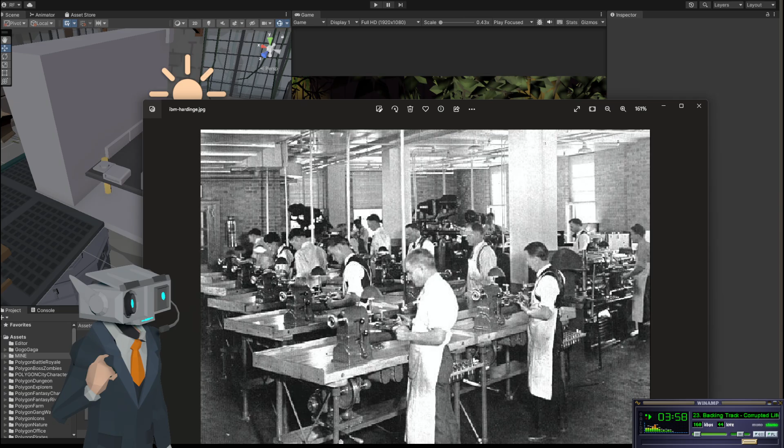Let's see if I can find a picture of mine. Should be fairly easy if my hard drive spins up. Because I will need to make some more parts for the robot, and I was thinking, you know what, why don't we do that on stream? It's like, what can I do on stream and maybe expand my horizons? I don't know how to... variety. There we go, add variety. I know I got a picture of this, the old beauty here somewhere. Really?

Well, while I'm staring at this, we might as well load up a little bit over here. Bam, make sure that's loading in so we can continue the rest of our work here. See, I thought I had some images or video of me making some of the robot parts. I swear I had them on here somewhere. Interesting. I will have to go hunting those down later, because for one thing, I want to see them.

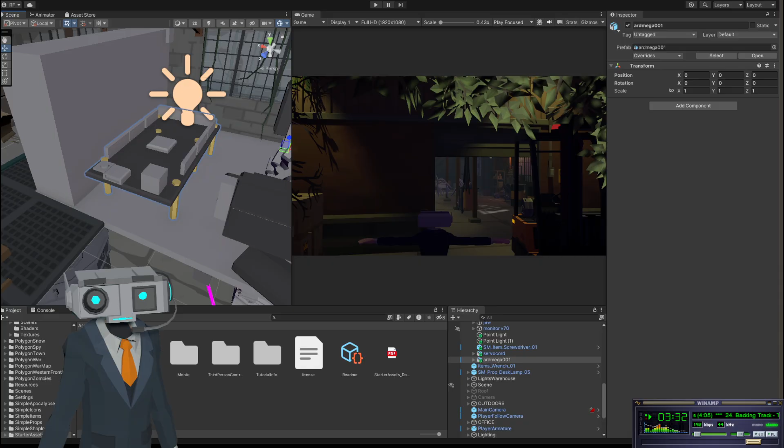It was made in 1940, I want to say 1943 or '46, probably 1946. It is not World War II vintage. In the US, most of the machinery was put towards the war effort, so they sprayed different paint jobs on them to signify whether it was for Army or Navy use and such. But nope, this one doesn't have that, so I think it's 1946. A little bit older than Rusty here.

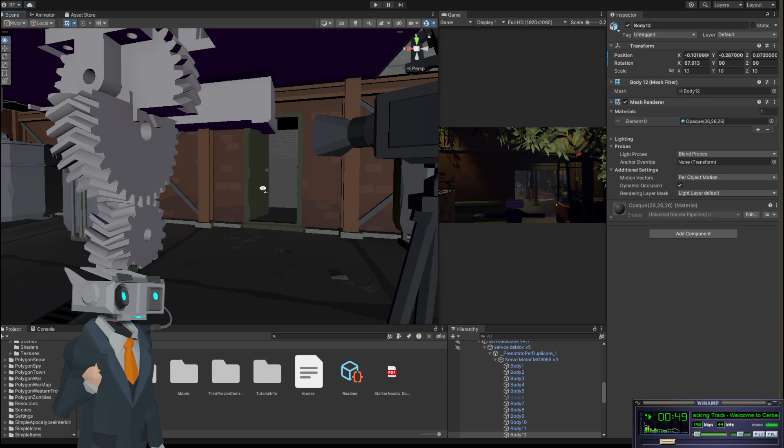And this is just his head, so I don't think I'm going to add in the side brackets for the neck and everything. What I might do is have him laying down on the floor, or being pressed up against the wall or something like that.

Yes, we have our war table here. What we're going to do is add a... probably just for now, I might just add a collider to just that part.

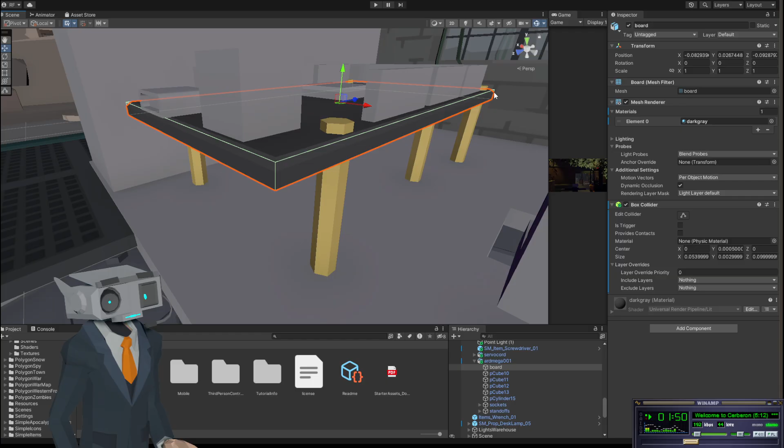Let's do a simple box collider. I believe it takes care of it by itself. It does, okay. Unity is fairly smart, and it basically made a box around the extents of where it needed to. So that's nice.

We've only got a little bit longer, so I don't think I'm going to do any more modeling in here, or in Maya. I don't think I'm going to load up Maya to do more, is what I'm saying.

But what we should do, what we should probably do, is add some more junk in.

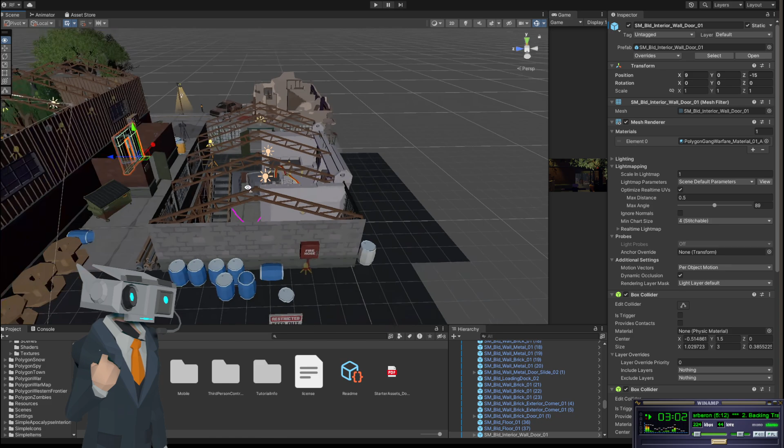So design-wise for Rusty Land here, I am going to be moving some of these features around a little bit, because I want there to be a tunnel. So instead of walking out this door here, I want it to be more of a tunnel into this building, because this building is submerged, the lower level is submerged. So I think it'd be more fun if we go down some stairs, if this leads down some stairs, and we separate these two buildings much further apart, so it takes a little time to get there. And maybe if we run into memory issues or such, it'll be loading time, so that corridor would be the loading screen.

Yeah, think about this level design stuff, which I haven't thought a whole lot about, to be honest. So I should give it a little bit of thought, because we are still dealing mostly with what's left of the example, the demonstration level.

Which does remind me, did I add them yet? I did end up purchasing the construction bundle. Oh, it's not in here.

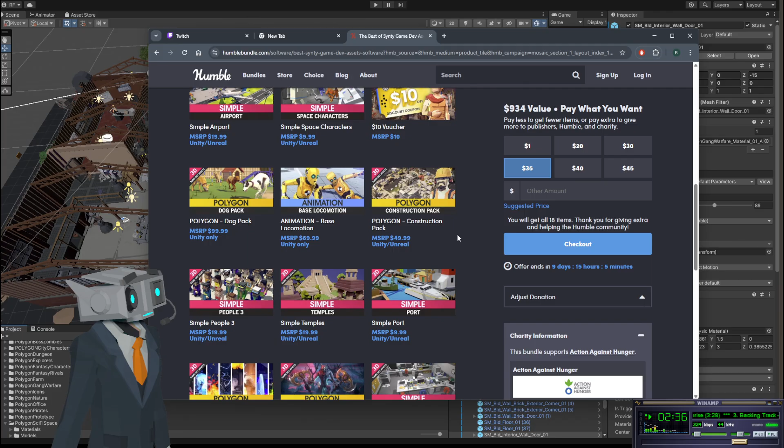But I did get this, I am excited for this one. Move that over here for a second. I don't remember if I went through this on stream or not.

But yeah, stuff, rubble, some construction equipment, some bare buildings, build-out kind of stuff. And these are finished renders, they put the time in to make this look good. All you get is the bits and pieces, but still a lot of cool construction equipment and stuff.

I've been wanting some of those for other projects, for instance, 3D printing them, because you can just 3D print some of these. So that's exciting.

I'm not going to load it in right now, I'll do that off stream. Load it into my asset project that we've been working on for a little bit now. What was this, like 2 months? 2 months, maybe a little bit more.

But we're nearing completion, and I'm not going to be putting the final touches on stream, or the final enough touches on stream. I want to leave a little bit of a surprise, so it'd be like, hey, what's around that corner, or whatever.

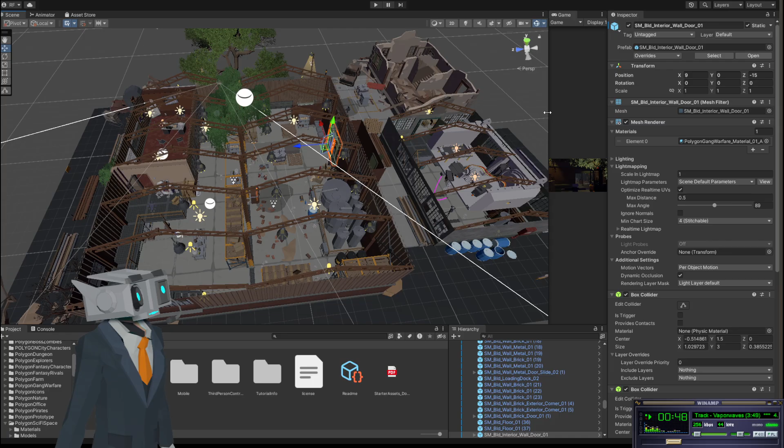But I think to wrap up the night, we're not going to bring the new gears in or anything yet. Ooh.

Exciting news though, I don't know if it's because I'm using the commercial trial version or whatever of Fusion, but I was able to export the assemblies for the back of the lens. They did export nicely as FBX files, and they do come into Maya now. So I can easily add in the stuff that I did put the time in to 3D model, or well, CAD model, that go on the back of the lens.

So that'll be in the near future. The next time we're doing all this, so next Monday, next Monday's plan will be to, one, show off the 3D printed neck, probably not attached. It's a lot of work to have the robot going at the same time as doing all these shenanigans. But I'll show off the 3D print part of it.

And I think next time we are going to do the lens assembly. We'll 3D model it, do a little bit of touch up and refining in Maya, bring it in here, bring in the LED and aperture assembly, which is the part that fits on the back of the lens. And then we'll get it hooked up.

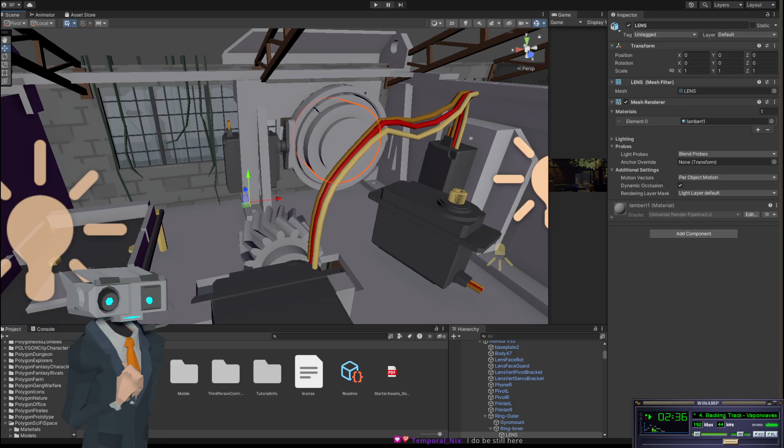So it moves. And then, Nix, if you're still here, then we can start hooking up Nix's idea of connecting the VTuber model to the environment. You still be here? Yeah. Because I think I don't want to just have these gears turning like when I'm nodding and side to side stuff.

But at least be able to toggle on and off, to have the lens gyro going, so it'll be tilting and moving. This servo here is connected to a bar over here, with little aperture levers, little movement.

And even if it's not connected to my tracking, because it won't be right away, we don't have that stuff in this project yet, I at least want a little animation going of it moving, so what it would be doing. But the plan is, once we bring it into the final unified Rusty Land project for my broadcast environment.

This room will be connected to my tracking, and I just think that's gonna be awesome. I do like that it has multiple effects. One, it's cool, you're inside the robot's head, the constructed robot's head. But you can lead the tour - well, by you I mean me. I can lead you on a tour of the inside of Rusty's head.

So when somebody says, well hey, cool robot, how does it work? Well, you see me nod my head from side to side? This is how we're doing it.